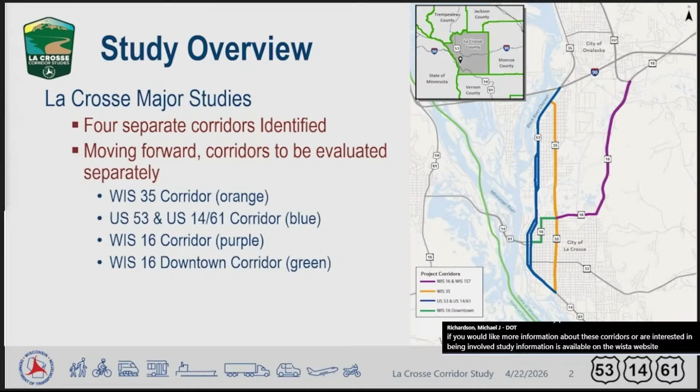The limits of the US 53 and US 14/61 corridor are from WIS 35 or West Avenue in the south to I-90 in the north, a length of approximately 4.3 miles. The scope of the study is to identify and evaluate alternatives that improve safety, traffic operations, and multimodal facilities while also addressing pavement, bridge, and utility infrastructure needs.

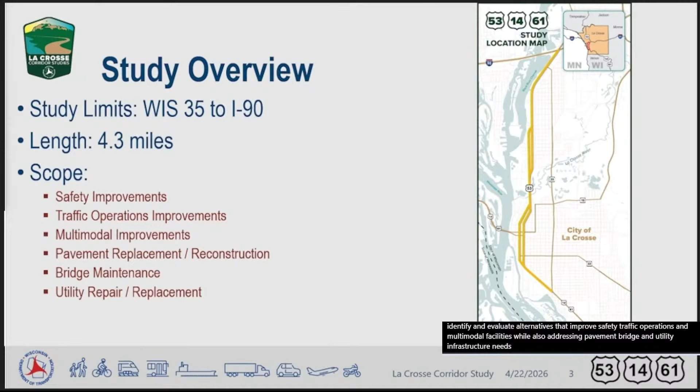A key component of a corridor study is the development of a purpose and need statement, which provides a concise description of the objectives of a project. The purpose and need statement for this study reads: the purpose of the US 53 and US 14/61 project is to improve the utility of the corridor for all travelers by addressing safety and traffic operations concerns, multimodal connectivity, and infrastructure conditions.

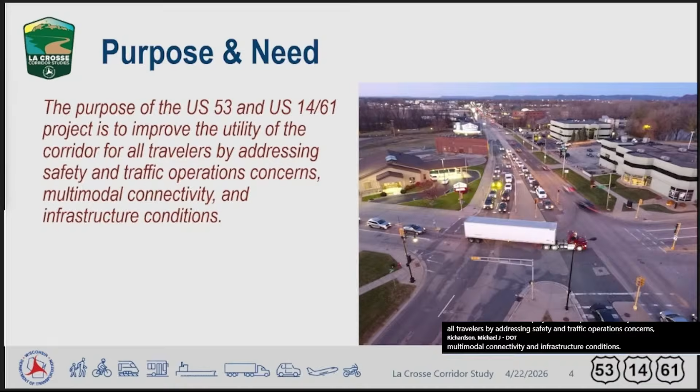The identified needs of the US 53 and US 14/61 corridor fit into 4 categories: safety, infrastructure, multimodal facilities, and traffic operations. A primary purpose of the study is safety improvement. 50% of the corridor and more than 20 corridor intersections have been flagged for safety concerns. Bicycle and pedestrian safety concerns were also identified throughout the corridor.

Corridor infrastructure is another area of need, with 60% of pavement sections in need of replacement and the remainder in need of rehabilitation. In addition, 3 bridges are due for rehabilitation, and public utilities are generally in need of replacement throughout most of the corridor.

Multimodal facilities were identified as an area of need, including high-stress pedestrian crossings, a lack of bicycle facility connectivity, and transit stop amenities or lack thereof. The final area of need is traffic operations, with 4 intersections exhibiting delay or backup deficiencies.

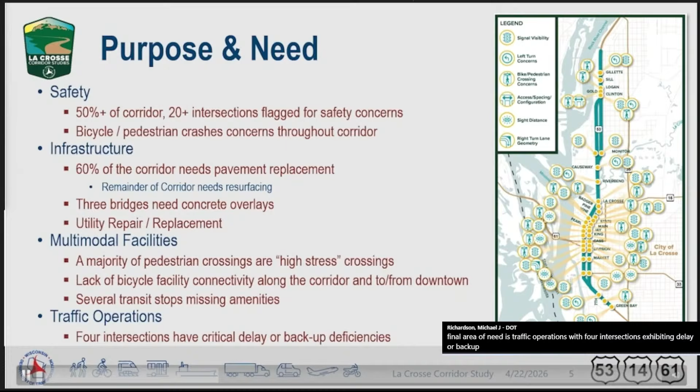Detailed alternatives were developed that meet the study purpose and need. These alternatives were presented at the last public involvement meeting and can be reviewed on the study website. The alternatives were screened using 6 criteria to determine which alternatives best meet the study purpose and need. The screening results were used to identify a recommended alternative.

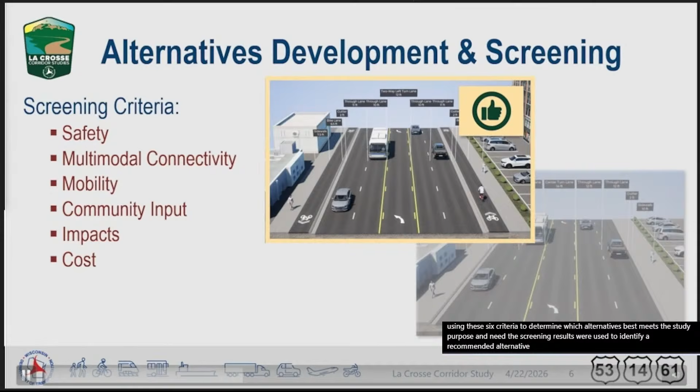Two public meetings have been held for this study. The first public meeting was held in June of 2024 and focused on the purpose and need and preliminary alternatives that were under consideration. The second public meeting was held in July of 2025 and focused on detailed alternatives, alternative screening, and a selection of a recommended alternative. Input gathered at these meetings, as well as from committees and other stakeholder coordination efforts, was used to refine alternatives and select the recommended alternative.

Following the second public involvement meeting, several changes and refinements were made to the recommended alternative. These changes were a result of feedback received from the public, business owners, city committees, and the City Common Council, in addition to engineering refinement. The purpose of this public involvement meeting is to present the updated recommended alternative and to provide a summary of what has changed from the recommended alternative presented at the second public involvement meeting. Roll plot exhibits of the updated recommended alternative are available on the study website.

Now we will provide an overview of the recommended alternative. It includes reconstruction of US 53 and US 14/61 from Jackson Street in the south to Clinton Street in the north. Pavement rehabilitation is planned for areas south of Jackson Street and north of Clinton Street up to Livingston Street. Spot improvements are planned throughout the corridor to address safety concerns. The recommended alternative includes adding bicycle facilities for most of the corridor by reducing the number of through lanes, narrowing through lanes, and/or removing parking lanes.

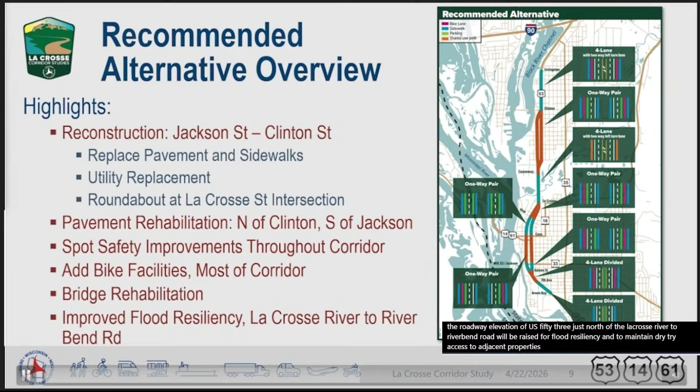In response to feedback during and since public involvement meeting number 2, 3 areas along the corridor have seen changes. These include a change in typical section in the downtown area, a change of bicycle facility type between La Crosse Street and Monitor Street, and a revision to parking configuration between Hagar Street and St. James Street. In addition to these typical section updates, a corridor-wide review of driveways and access management has been completed, and several new access management updates are proposed. We will discuss the details of these changes in the next few slides.

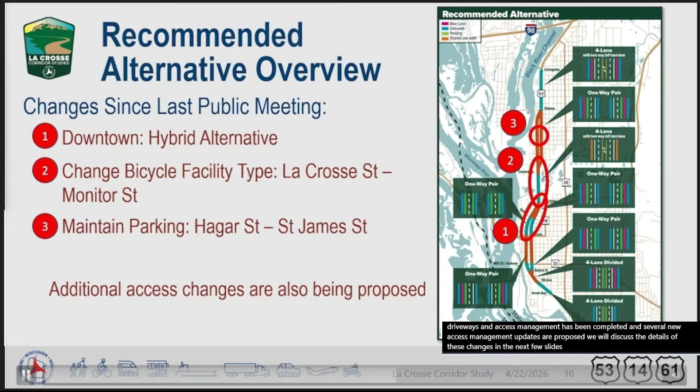Following the last public involvement meeting, we heard feedback on the importance of parking in the downtown area. This led to development of a new alternative in this area called the hybrid alternative. From Vine Street to La Crosse Street, the hybrid alternative includes adding sidewalk level bike lanes. This does require removing parking from one side of both 3rd Street and 4th Street.

However, due to existing parking restrictions in this section, only a few parking spots will be lost. From King Street to Vine Street, the hybrid alternative includes maintaining parking on both sides of 3rd Street and 4th Street and improved pedestrian accommodations by widening sidewalk and terraces. This section would not include any bicycle facilities.

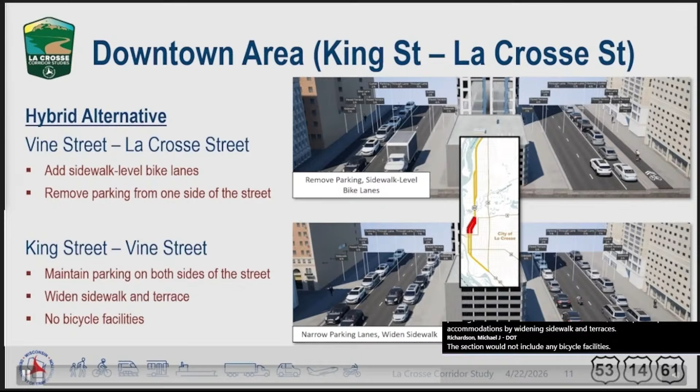While the hybrid alternative doesn't include bicycle facilities from King to Vine Street, it does improve connectivity for bicycles to downtown destinations by extending bicycle facilities to Vine Street from the north. Connections to existing parallel bicycle facilities on 2nd Street and 6th Street can be made using King Street and Vine Street. The hybrid alternative was supported by the La Crosse Common Council and has been incorporated into the study recommended alternative.

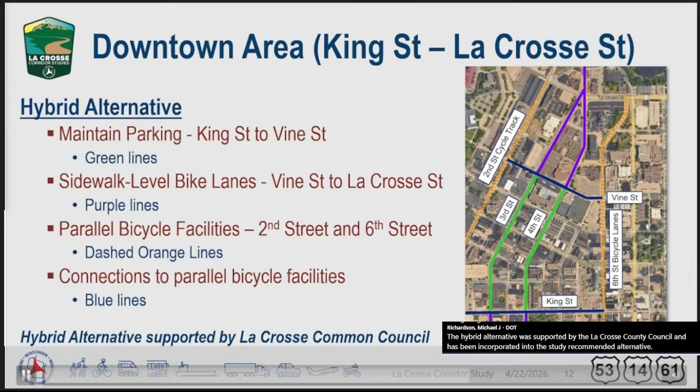The sidewalk level bike lanes included in the recommended alternative from La Crosse Street to Monitor Street were reevaluated and shared use paths were considered. Shared use paths in this constrained area were determined to reduce property impacts and allow for grass terraces, providing more space for signs and light poles. Additionally, shared use paths improve ease of travel for bicyclists, with many destinations in this area on both sides of US 53. Shared use paths are now included in the recommended alternative from La Crosse Street to Monitor Street.

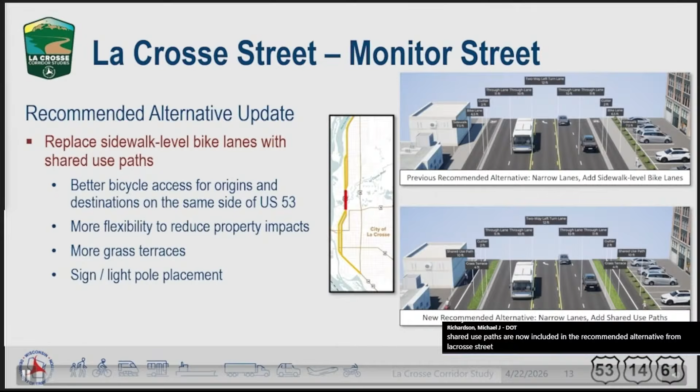The previous recommended alternative in the Monitor Street to Clinton Street section removed parking from the left side of the street and added sidewalk level bike lanes on both Rose Street and Copeland Avenue. The study team heard from residents and business owners that this parking is highly utilized in the 2 blocks bounded by Hagar Street and St. James Street. There are several businesses in this area and destinations like Copeland Park and Loggers Stadium nearby. To address this concern, the recommended alternative has been updated to maintain parking on both sides of the street in this 2-block section and still incorporates sidewalk level bicycle lanes.

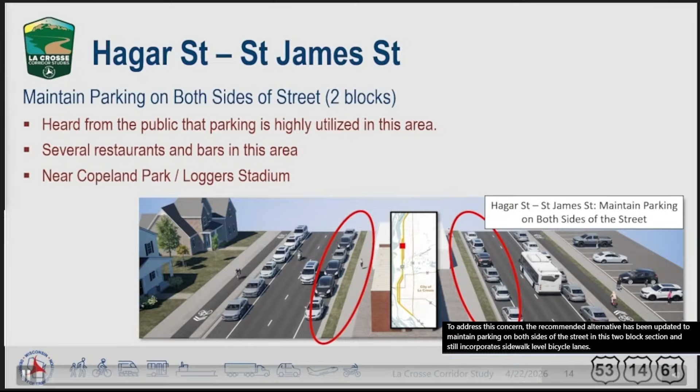The recommended alternative includes 16 driveway closures and 8 driveways with reduced access to address safety issues identified at key locations. Since the last public involvement meeting, a corridor-wide access review was completed to identify potential closures of driveways that appear to be unused, driveways that lead to nowhere, or driveways that are redundant. This review identified 43 additional potential driveway closures.

All access management updates are visible on the roll plot exhibits on the study website. Notices have been sent to all property owners and tenants that may be affected by these proposed updates, and we are available to meet to discuss any resulting property impacts upon request. WisDOT will work with property owners to ensure reasonable access is provided for all properties.